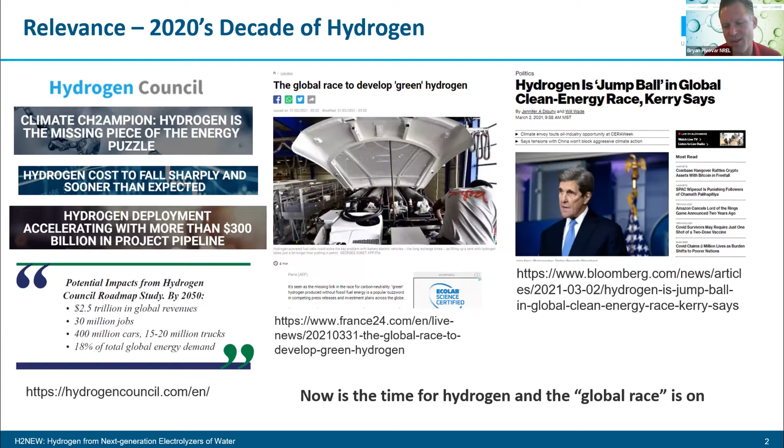I started to do my thesis work in fuel cells in 1994, and it was always that hydrogen was 5 or 10 years away, and that was true until 5 or 10 years ago. And I'll talk a little bit about why that is. But you'll see things that had never happened before, things within government, the president pushing things, the Secretary of Energy pushing things.

One of these things in particular is this Hydrogen Energy Earthshot. And basically, the tagline is 111. It's to get to $1 for a kilogram of hydrogen in 1 decade. There's lots of graphics and other things, but it's really a driver for this. If we can get down to $1 per kilogram of hydrogen in a decade, it will really help enable a sustainable energy future for the planet that's much more economic than what we would otherwise be able to do.

So within some of the recent legislation, there's this bipartisan infrastructure law. It's being called BIL within the hydrogen community, and it has $9.5 billion for clean hydrogen over the next 5 years. 8 billion of that is for clean hydrogen hubs. Jim talked a little bit about this. I expect there to be different regional hubs, and that they'll probably cover the entire country. The language in the law basically says that there's going to be at least 4. I would expect probably 8 or something like that, and the regions to be pretty diverse.

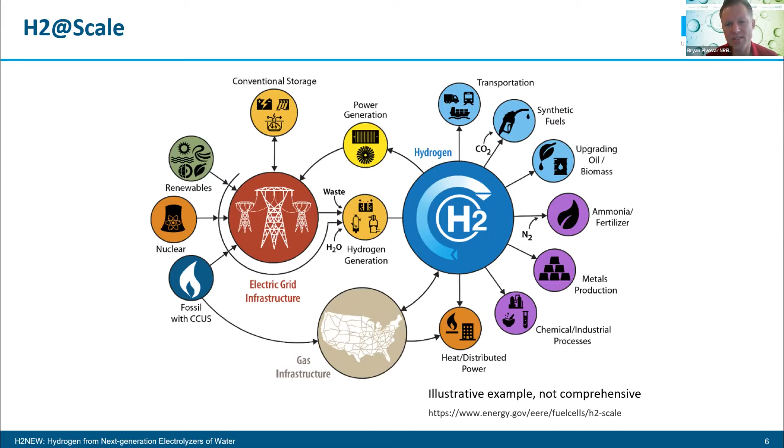But the real benefit of this is the ability to move energy across sector and across time. And then hydrogen also has this unique, clean and efficient end use capability. So those are the key attributes of it. This results in some economic benefits, some security benefits in terms of the energy and manufacturing bases, and even some economic benefits in terms of jobs, as well as the environmental benefits, which are clearly obvious. But to me, the overarching part of this is that a lot of solutions to these problems can take on one part of this.

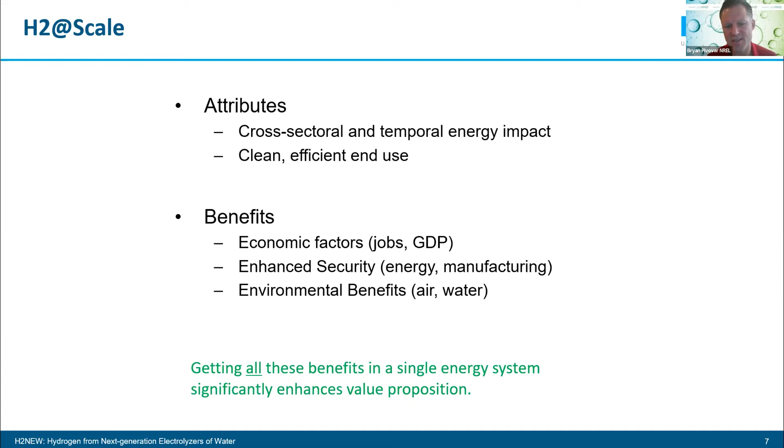But with hydrogen, and bringing in especially green hydrogen into these situations—although blue hydrogen is a great stepping stone on the way there—getting all of these benefits in a single energy system really provides a lot of the extra value, making the sum greater than all of the parts.

So what the Department of Energy is doing is they have this broad mission for hydrogen at scale. It really comes down to how do we make, move, store, and use hydrogen more cost effectively. There's a bunch of early stage research that's basically helping de-risk these technologies.

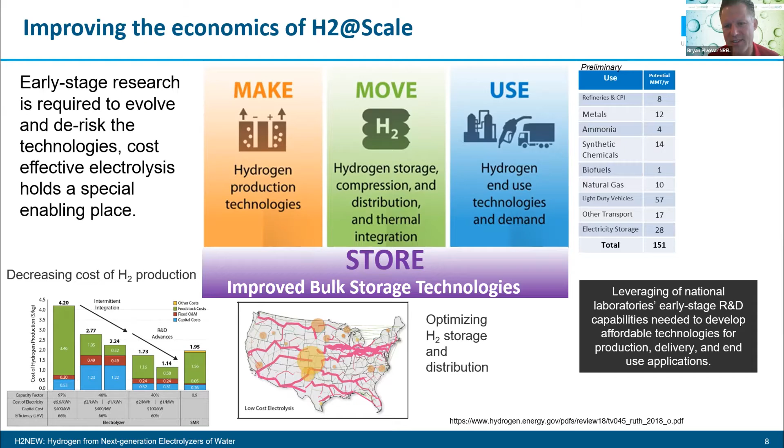Cost-effective electrolysis holds a specific place. There's different work we've done, both experimentally and analysis, that talks about bringing down the cost of hydrogen production, how you'd move and store the hydrogen most cost effectively, and then the different areas where you'd actually use this hydrogen—what markets would demand it first, and what markets it would spill into later based on cost advantages and other considerations.

Coming back to this bubble chart, while hydrogen at scale is making, storing, moving, and using hydrogen, making hydrogen is the inherently obvious first step that can spur everything. A lot of the focus of what I'm working on now is really this electrolysis. When you think about hydrogen production, electrolysis has really competitive economics, but it also serves to balance renewables in a way that has a larger benefit than just providing hydrogen to these areas. It also allows for greater renewable penetration and enables the whole energy system in ways that go beyond that.

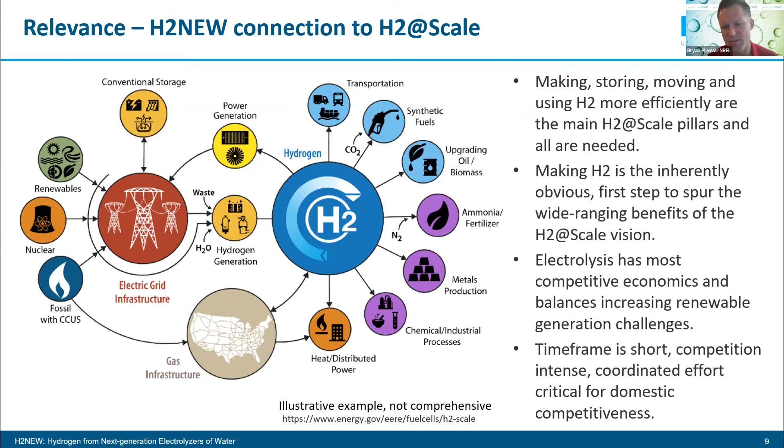But the time frame is short and competition is intense. A lot of what we're trying to do in the Department of Energy and at the national labs is have this coordinated effort that we think is going to be critical.

And that's because it's based on current electricity prices and isn't taking into account what will happen with the introduction of more low-cost renewables, and what happens in terms of the curtailment options in helping to decrease those prices or offsetting the curtailment issues to basically provide value where you'd otherwise have no value. And then there's this issue of capital costs and fixed O&M that also have to be addressed.

We have different pathways. I'll show a couple of them coming up. There's work being done in polymer electrolyte membrane systems, solid oxide electrolysis systems, and now we're looking at alkaline electrolysis systems as well. But we need low-cost electricity.

We want to have efficient systems. They need to be low capital cost. We need to work on durability and lifetime, particularly under intermittent or variable operation, because most electrolyzers have been made to run 24/7, which tends to be much easier on the systems. And they've also been over-engineered because they've been using expensive electricity.

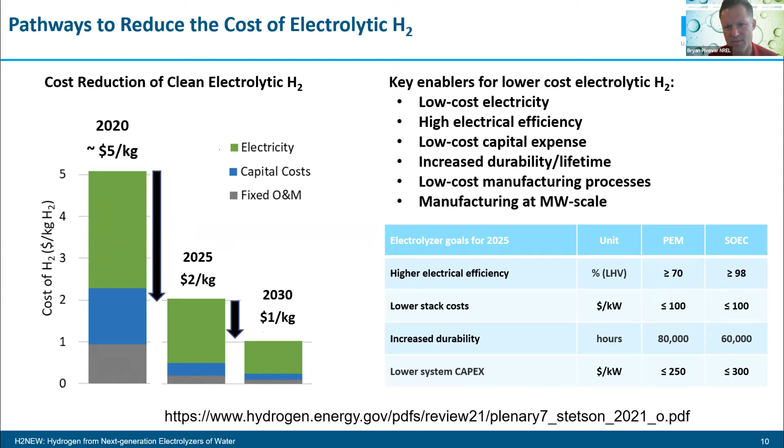So saving a few hundred millivolts, or even tens of millivolts, when you're using expensive electricity allows you to put more into the capital cost of these systems. And so these are all things that we're taking on at some level.

There's different pros and cons for each of these electrolysis systems. Alkaline is the big deployed system—they've been put out in 100 megawatts. There's a project in Saudi Arabia coming online that's going to be 2 gigawatts using ThyssenKrupp supplied alkaline electrolyzers.

The problem is they have a corrosive electrolyte. They have trouble with differential pressures and they don't really cycle on and off very well. So if you have 24/7 provided input power, like at dams, which is where these have usually been sited in large sizes to date, you're absolutely fine and you can do things reasonably cheaply. But the PEM membrane, the polymer electrolyte membrane technology, is related to the fuel cell vehicle polymer electrolyte technology.

It allows for things like differential pressure, better load following, and startup and shutdown. But it does have limitations in that the acidic environment requires using things like titanium, iridium, platinum, and perfluorinated polymers that are more expensive.

So there's a bunch of work being done to advance that. Solid oxide systems are more efficient than alkaline or polymer electrolyte systems, but they have challenges with high temperature and thermal integration aspects, and steam conversion efficiencies.

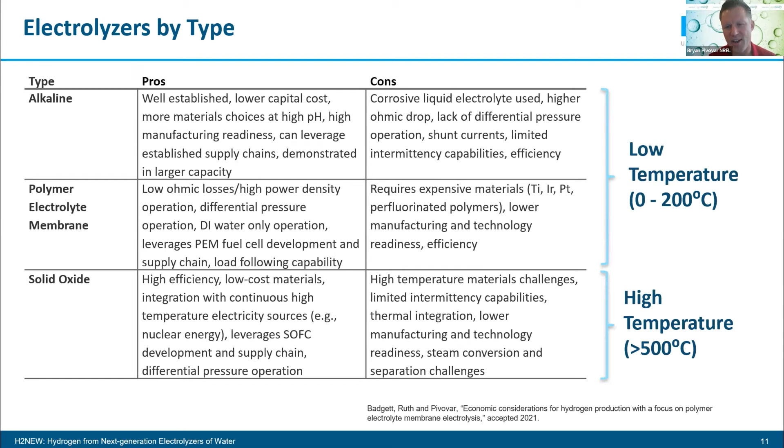I'm the director of H2NEW, which is this $50 million over 5-year program, and this is really the basis for the $1 billion over the next 5 years that's coming. So we're expanding significantly. H2NEW to date has really been focused just on the national labs, doing the base work to put things together.

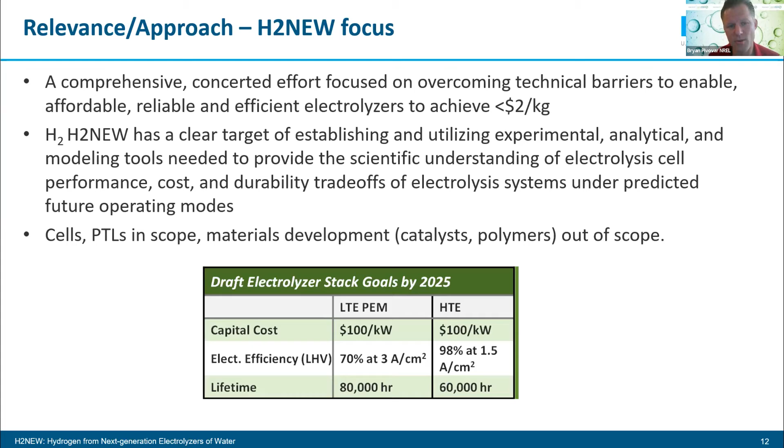But bringing in industry and academics is going to happen - it was going to happen anyway. And now that we have this new infrastructure language in the law, it's going to explode in terms of who's doing what and how it goes forward.

I'm not going to talk about these in the depth they probably deserve, but basically there's a stack capital cost for PEM electrolyzers that we're trying to take on within H2New. Basically, if we project some things, we can come up with something like a $350 a kilowatt number for these.

We can break those costs up into the different components, and you can see the colors associated with it there. Then basically we're focusing on three areas highlighted to the right: increased efficiency or current density, decreased platinum group metal loading, and scale up.

You can see by these green bars how much we're looking to take out of the cost of these systems from here to about 2023, and then the ultimate target of H2New in 2025, trying to get down to $100 per kilowatt by taking out these different areas with specific targets. So that's what we're focusing on going forward.

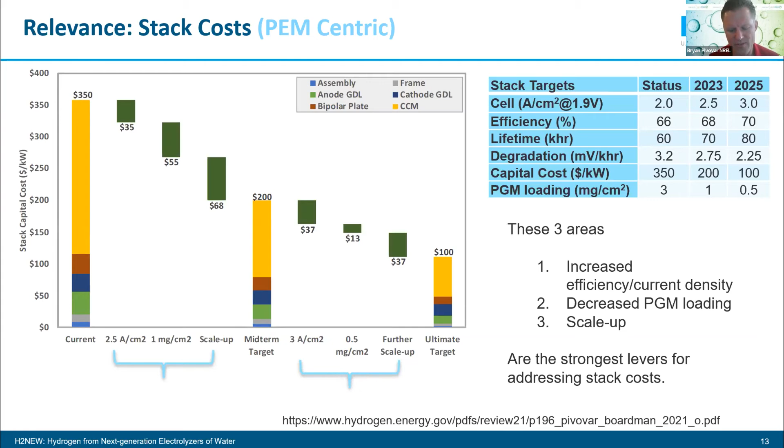Stack costs are one thing, but what you really care about is the hydrogen levelized cost. So what we're looking at here is basically, we can do these things, but what does that mean for the cost of hydrogen? Currently, if you had these systems at the scale we project, assuming 3 cents a kilowatt hour electricity available 90% of the time, for things like...

$3.50 a kilogram. We have a target for 2025 to get towards $2 a kilogram, and an ultimate target, the hydrogen shot type target for 2030, of getting the costs down to less than $1 per kilogram for hydrogen.

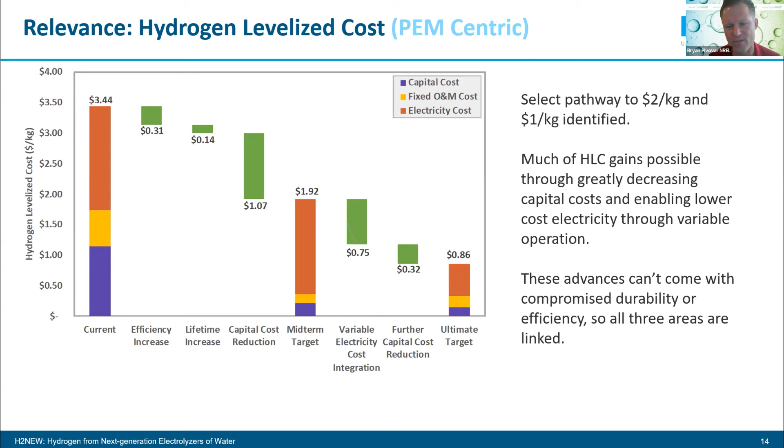So these are the things we're trying to do on the production side. A lot of what we're doing in H2New is based on the fact that currently you run electrolyzers at continuous levels, and maybe you'll turn them off.

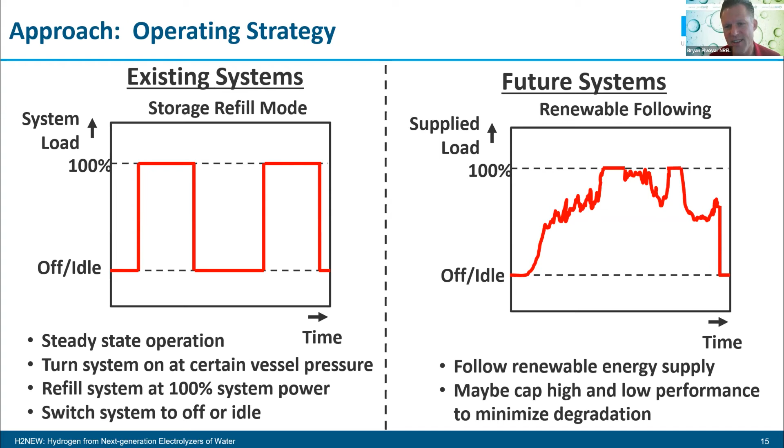But if you look at those operating modes compared to some of the things Jim showed earlier, like these solar profiles, what that would mean in terms of different operating strategies, and also what this means as far as the engineering of the systems themselves.

Existing systems use a lot of platinum, have really thick membranes, and have been over-engineered for durability. They've been used for things like life support or industrial hydrogen, where industrial hydrogen is a very valuable commodity and people are willing to pay something more like $20 a kilogram instead of these $2 a kilogram targets.

In the future, you basically have to take all of the cost out and figure out how to enable these low-cost electrons to be used. So you want to go to higher operating currents, and use thinner membranes with lower loading.

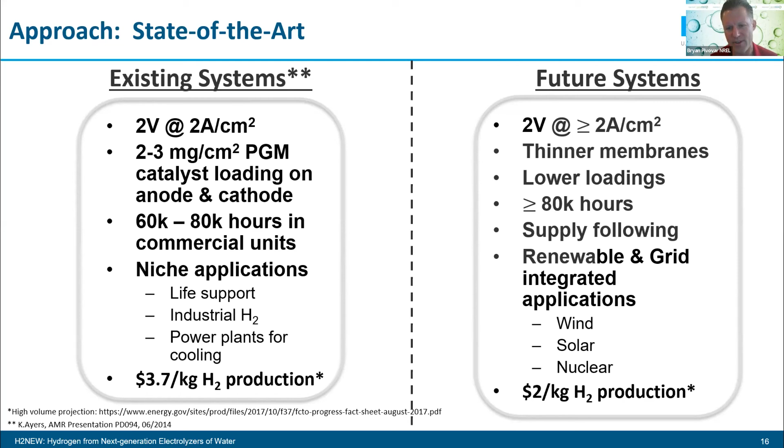Most of what we're doing is trying to focus on what these systems of the future will look like and what it means to try to operate them under the conditions we think will be relevant operating conditions in the future. I'm going to show something quickly here.

This is data from 2017 on locational marginal pricing of electricity in the Palo Verde area, which is connected to California and Arizona. This is an area that has about 10% solar and 10% wind.

If you look at these locational marginal heat maps on the left, you can see when electricity is expensive and when it's cheap. The top one is the 25% cheapest electricity, with a price ceiling of 2.1 cents per kilowatt hour on a wholesale basis, but the average price of that 25% is 1.2 cents a kilowatt hour. This is how you get towards cheap electricity.

And this is happening with just 20% renewable penetration. As you go down, you see gaps of expensive times early in the morning and late at night, and somewhat seasonal when air conditioning loads are high but solar and wind aren't filling in the gaps as much.

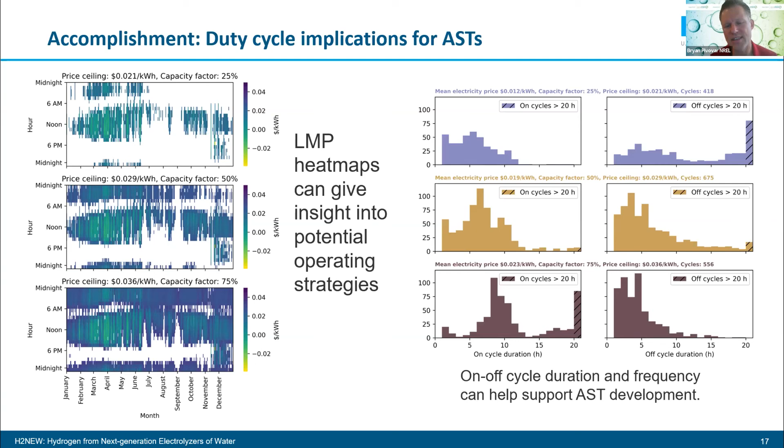On the right, this gives an idea of how you might want to operate electrolyzers if you only wanted to run them during the cheapest hours. We're trying to get this information because increasing renewables will create more volatility in electric markets and more low-value electrons. How do we use that to enable things like electrolysis to bring hydrogen to large scales?

These are the cost curves per year, and Palo Verde is this light brown line used in the data beforehand. You can see there are two other areas with lower electricity costs available around the year for large amounts of time.

We can take that data and do other analysis, like on the right, to talk about how we'd operate an electrolysis system and get to cheaper electrolysis prices that enable us to reach $2 a kilogram, or $1.50 a kilogram in this case, of produced hydrogen—not using future electricity rates, but rates that existed 5 years ago in wholesale markets in specific areas.

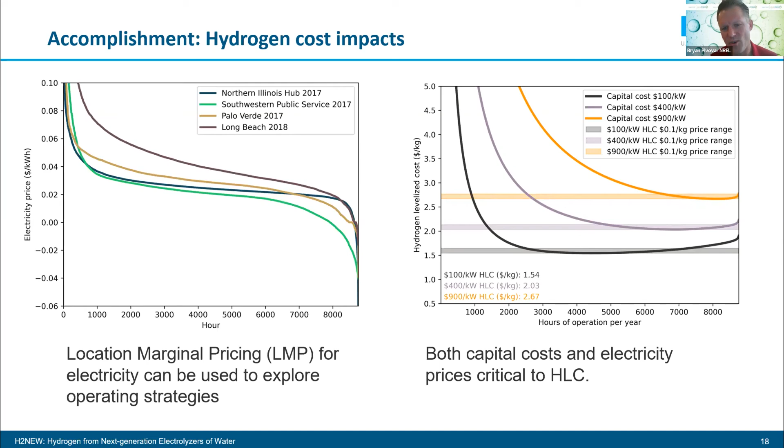The last thing I'll mention, since we're interested in interacting more with industry and academics, is what we're doing in H2New, the big consortium I'm director of. We're really looking at how we take on durability—we think durability is a really big issue.

We're looking at fundamental degradation mechanisms, accelerated stress tests, and mitigation approaches. All of this is to determine the cost, performance, and durability trade-offs of electrolysis systems so they can be put into the energy system and operate in the most economic way. We're worried about performance, and then we're trying to help scale up.

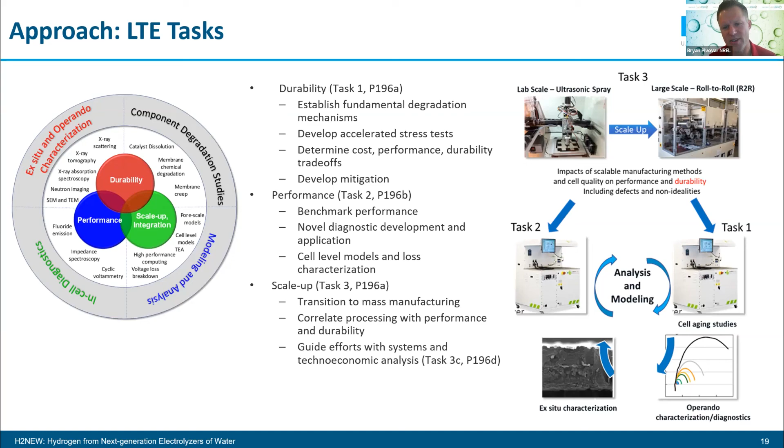These are all things NREL is trying to help lead, along with a bunch of other national labs, bringing in industry and academics to move this forward.

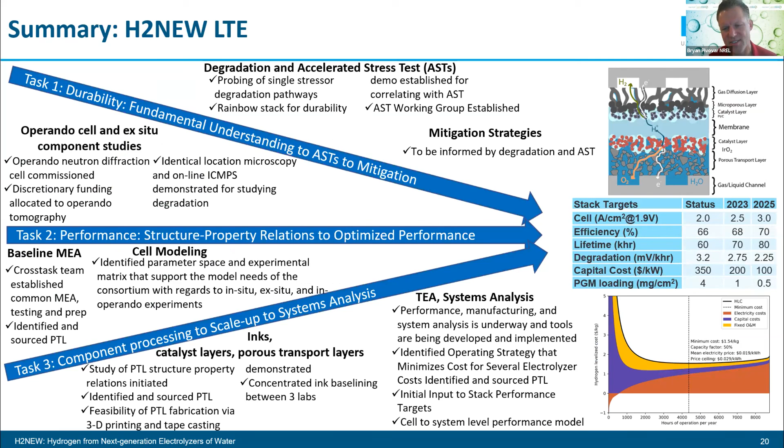Here's one slide on H2NEW that has way too much information—it's basically talking about the approach we're taking to address these systems. I don't even want to talk about it because I'd rather have discussion and questions, but there are whole presentations I give just on this.

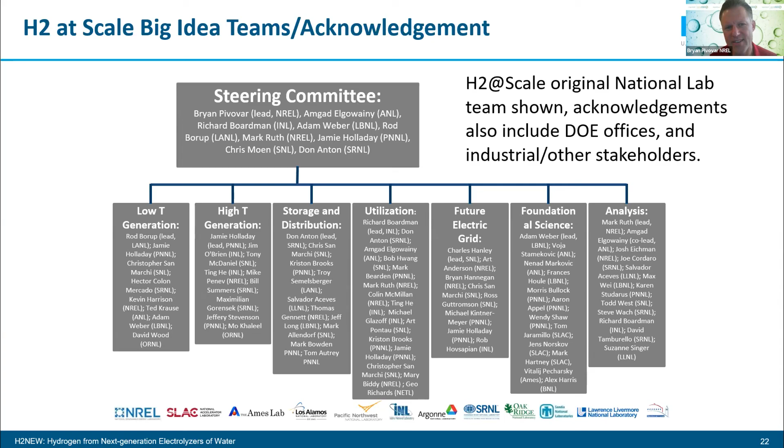There's a whole bunch of people in H2NEW who I owe special thanks to, and the people who helped put the big idea together, which became Hydrogen at Scale. But with that, I'd be happy to take any questions you might have on the topic of hydrogen.